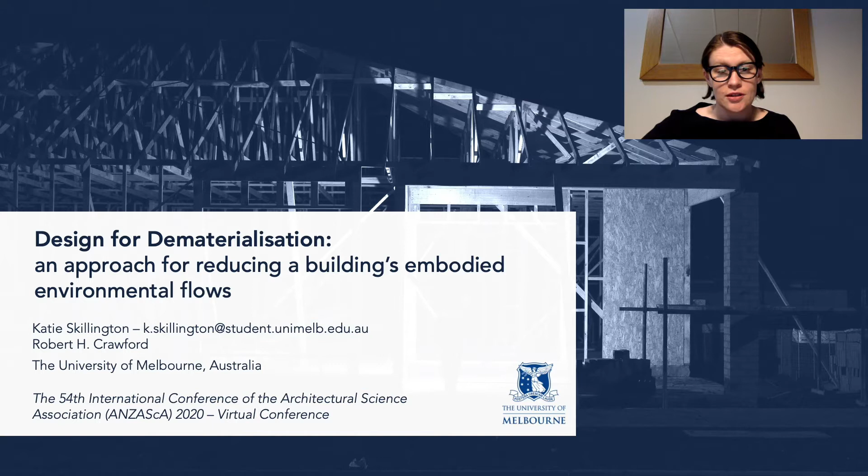My name is Katie Skillington, and today it's my pleasure to virtually present this paper, Design for Dematerialisation, an approach for reducing a building's embodied environmental flows.

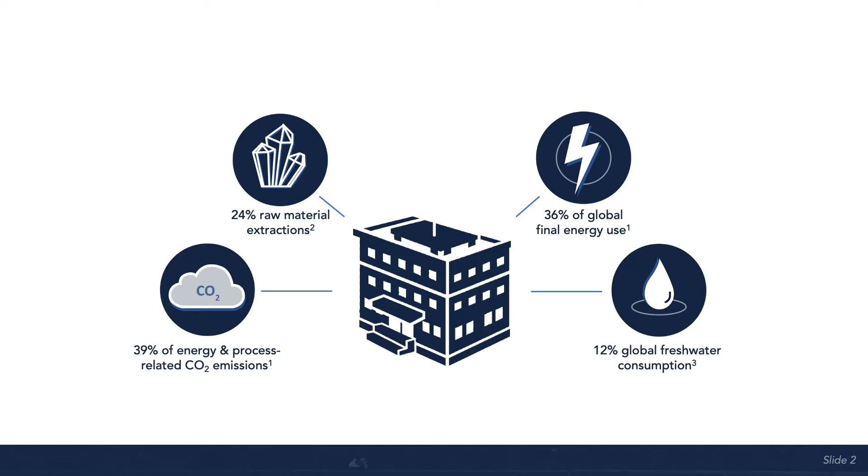We're all aware that building operation and construction contributes to significant environmental degradation, and as a result, the sector is under pressure to rapidly adopt more environmentally sensitive practices in creating the spaces in which we live, work, and dwell. To date, most efforts in doing this have disproportionately focused on the effects arising from building operation, which overlooks the increasingly significant embodied environmental flows such as water, energy, and greenhouse gas emissions.

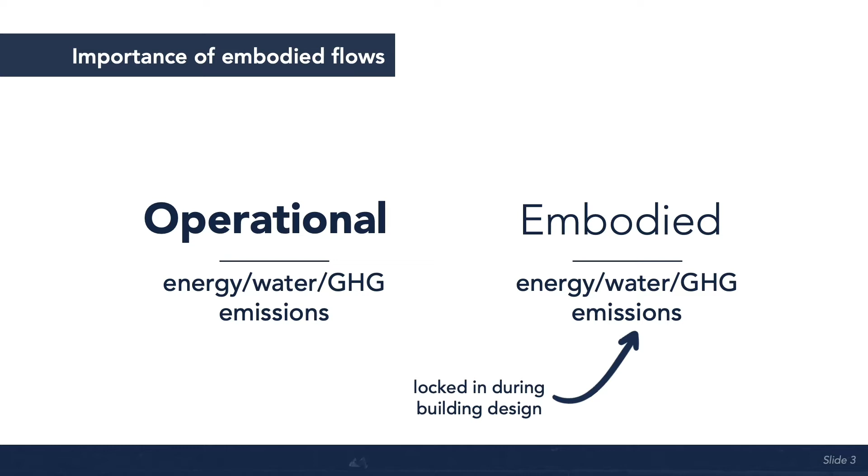These initial and recurrent embodied effects are often locked in during the building design phase, with a spike in demand or emissions occurring at building construction. With building operational efficiencies continually being improved and regulated for, and net zero and nearly zero energy buildings becoming more commonplace, a trend of embodied flows outweighing operational flows has emerged. Amplified by a continuing demand for construction material and resources due to population and building area growth, the need to address embodied environmental flows has never been more important.

So who is well placed to address this challenge? Stakeholders who determine a building's construction assemblies, materiality, and finishes, so designers. To do this though, we need to support our design stakeholders with improved information on design approaches that target a building's materiality and their possible effect on embodied environmental flows.

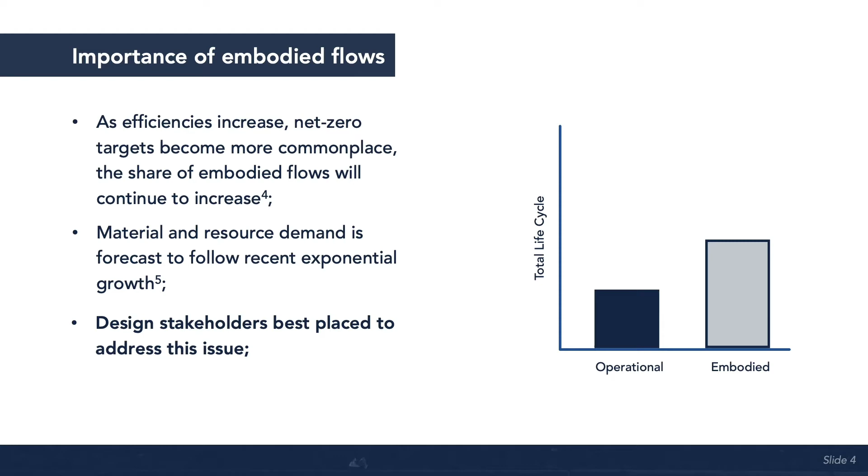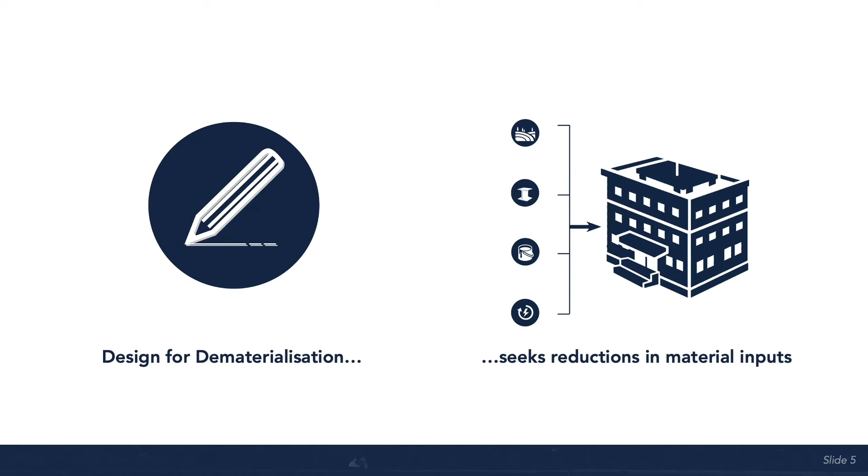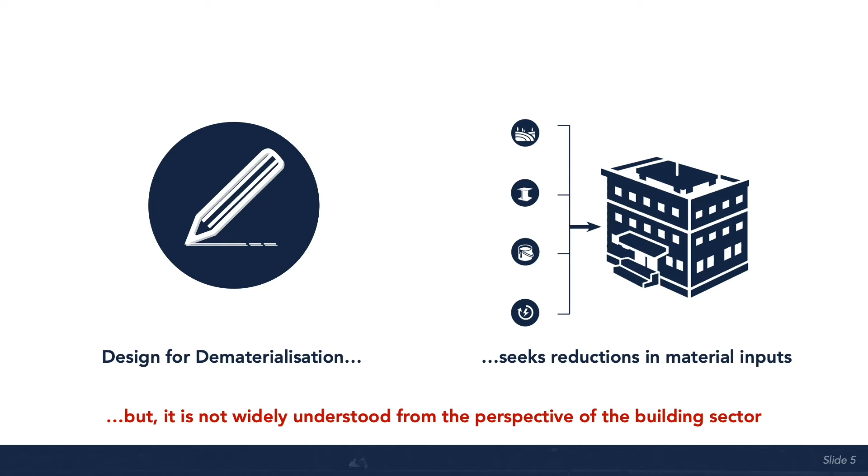Design for Dematerialisation, which is concerned with the reduction of material and resource inputs, is one approach that warrants further exploration due to its hypothesised potential. But it is currently not widely discussed in the building sector. This study sought to start to change this by providing the beginnings of this understanding, both conceptually and operationally.

Conceptually, as an approach, dematerialisation is more commonly researched and applied in the fields of industrial ecology, product design, and manufacturing. By using these sources and the limited literature in the building and construction field, this study defines design for dematerialisation as an early-stage design approach that prioritises reduced material and resource inputs across all life cycle stages of a building, whilst not negatively affecting the building's operational performance or intended function.

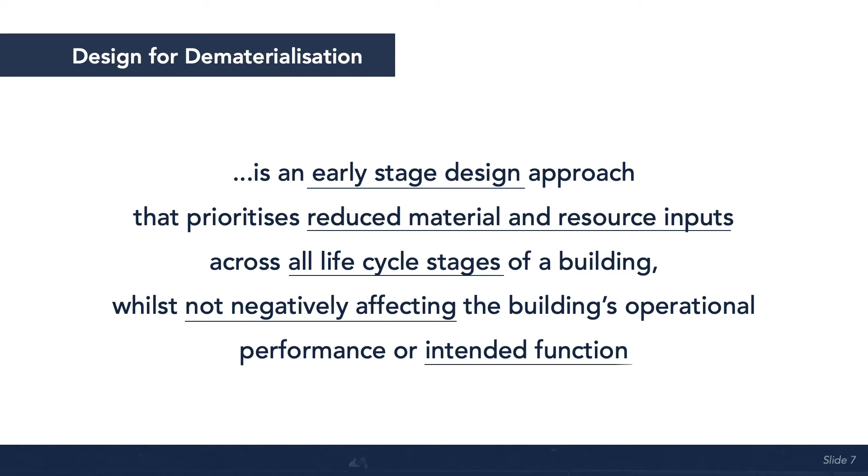Although dematerialisation bears strong similarities to principles of other concepts, when reviewing the literature, one point of difference emerged. Dematerialisation is not solely concerned with incremental efficiency improvements or material substitutions within existing product systems or designs. Whilst efficiencies and substitutions may contribute to progress, efficiencies alone will not ameliorate the effects of the forecast increase in demand for resources, nor will any material substitutions that don't account for indirect impacts.

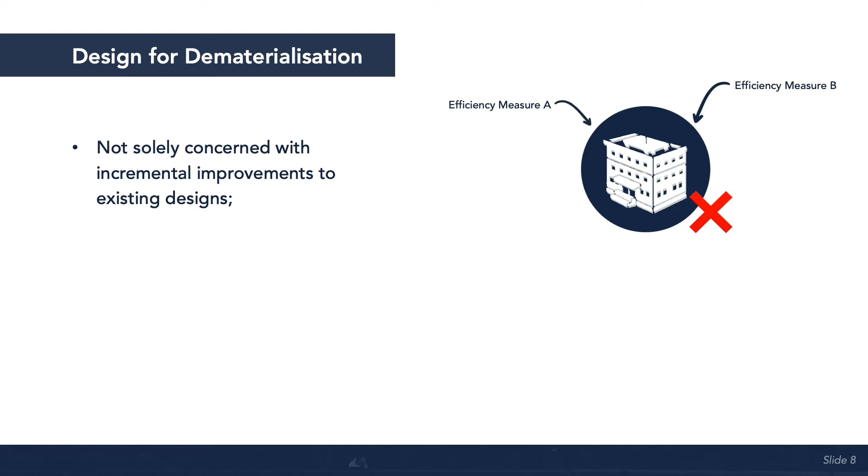Instead, dematerialisation requires a fundamental rethink or redesign of the product system from project inception, employing a life cycle perspective so that all indirect and direct impacts are considered and addressed from early on.

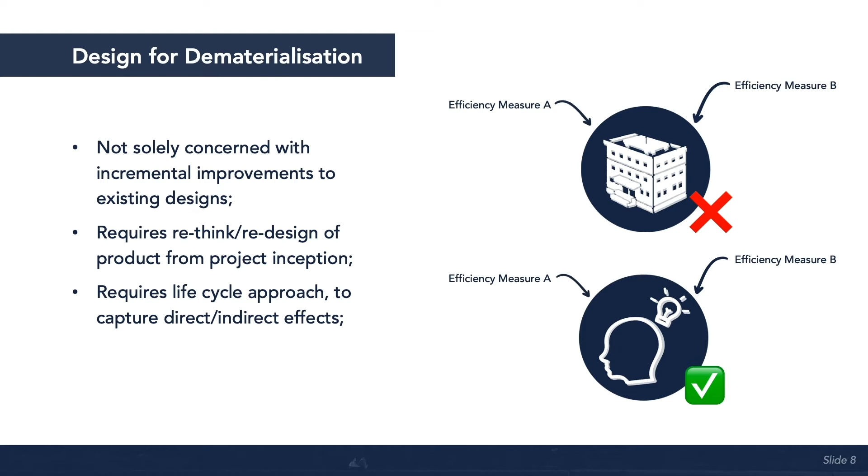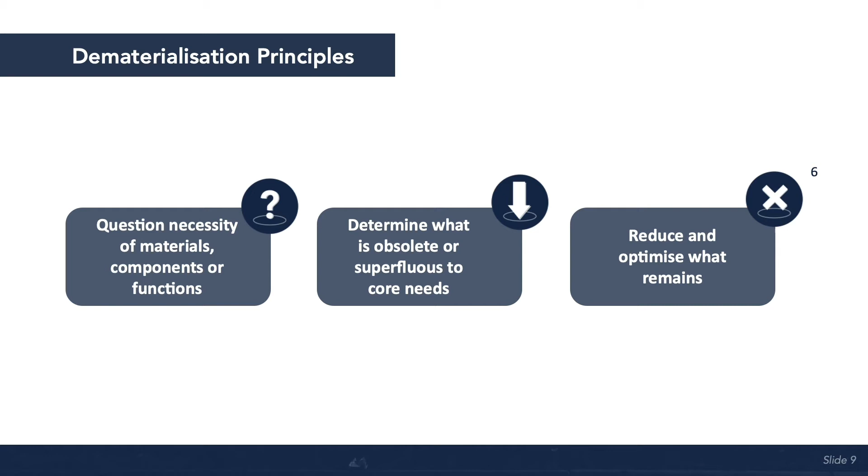To form an operational understanding of the approach, some broad guidelines and actions were deduced from existing literature. Firstly, beyond the adoption of a life cycle perspective, Brown and Lutz-Carrillo suggest applications of dematerialisation should be guided by a tripartite strategy, starting with evaluating the necessity of components or functions, then determining which aspects are obsolete, and finally reducing and optimising what remains.

Implicit in these guidelines is a questioning of user needs during early stage or pre-design work, and experimentation with alternative modes of delivering on these needs.

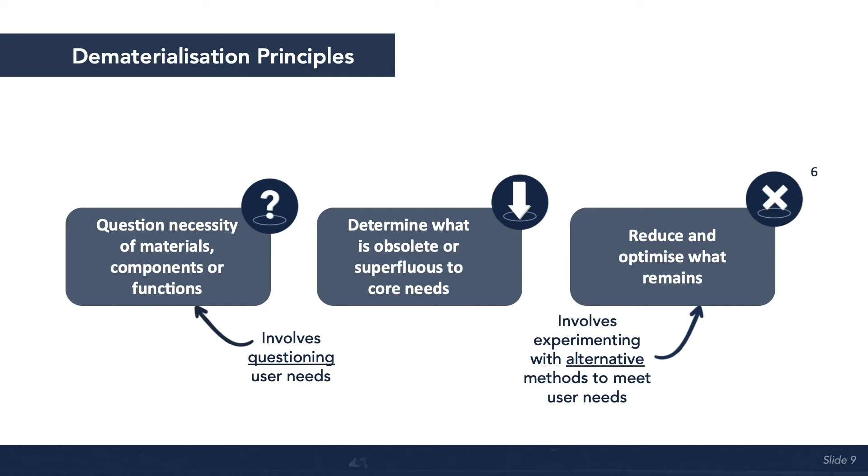Beyond these guidelines, there are also some broad actions that were determined as being part of the design for dematerialisation approach. Reduction via optimisation, which is probably the most obvious, includes reducing overspecification in structural systems, lightweighting, building system or construction assembly simplification, low energy, carbon, water intense products, or just simply getting rid of materials that are superfluous to servicing basic user need.

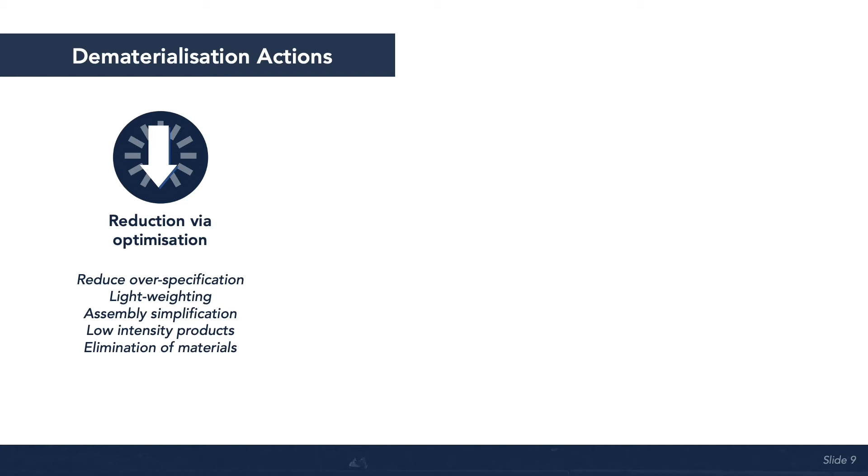Next, more intensive use. It was determined that this may involve reducing the physical footprint or size of a building, incorporating shared functions, or designing for multifunctional spaces and ongoing adaptability.

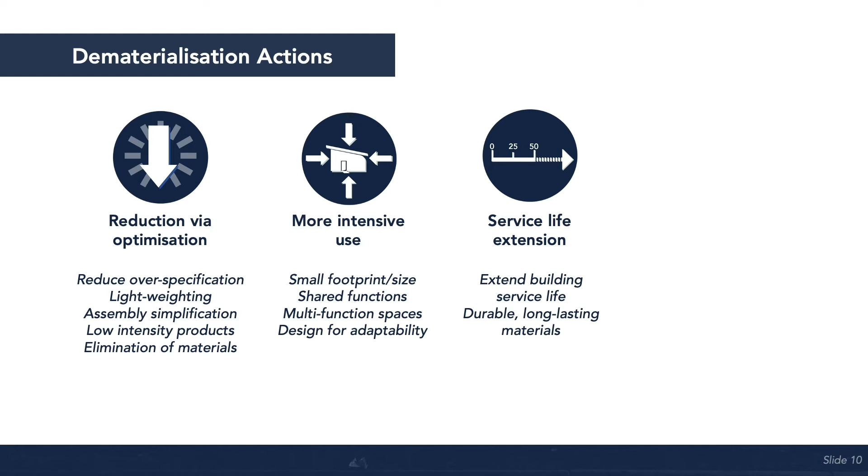Service life extension sounds pretty straightforward, and that's supported by the specification of more durable materials that require less frequent replacement or refurbishment, or designing for a longer building service life as a whole.

And finally, reuse, recycling and repair, which can occur across multiple scales. So it could include something as big as the adaptive reuse of an entire building structure, the reuse of a small component, or the use of recycled construction waste in the creation of a new product.

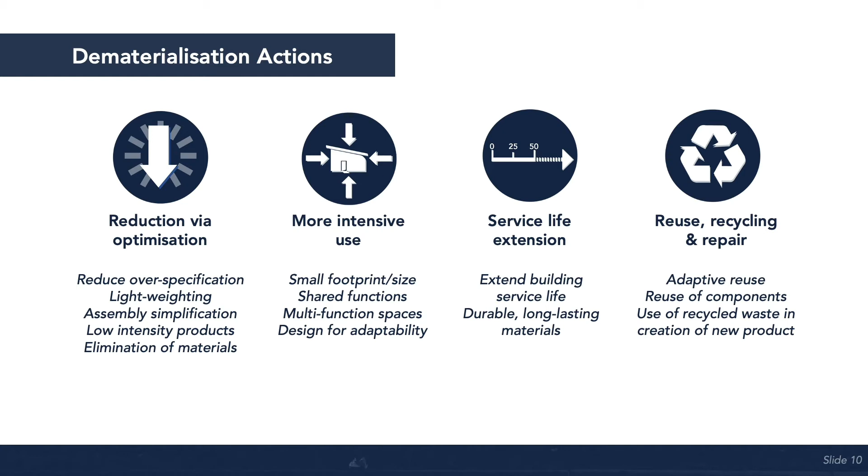Although dematerialisation research in the building sector was found to be not extensive, several drivers and barriers can be inferred from other fields. The primary driver identified was often cost, and the desire to lower a product's production cost by reducing material inputs.

Considering that cost is often cited as a barrier to the adoption of many environmentally sustainable design and construction practices in the building sector, this may position dematerialisation as an accessible, comparatively lower cost option for improving the environmental performance of buildings.

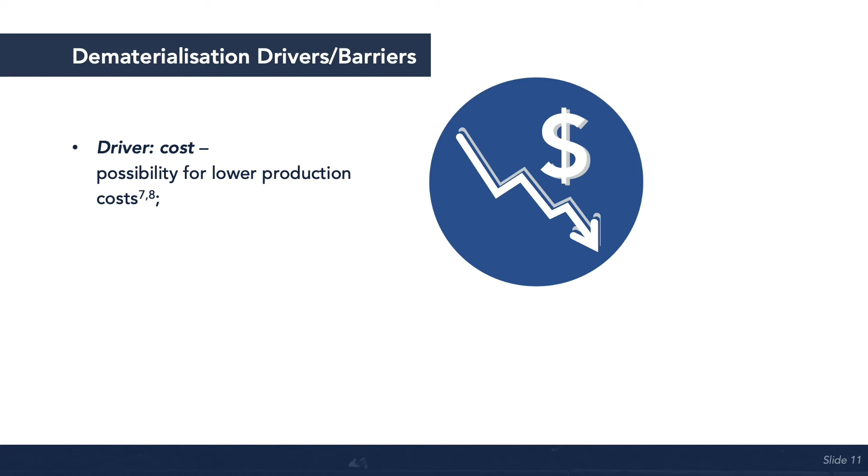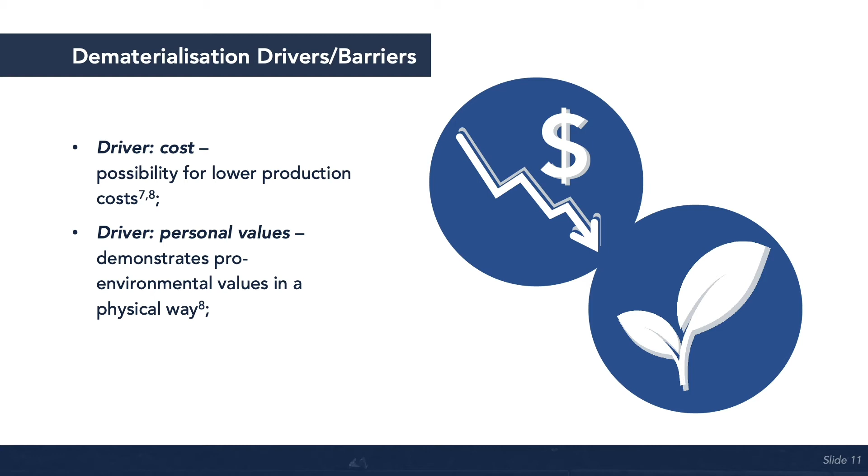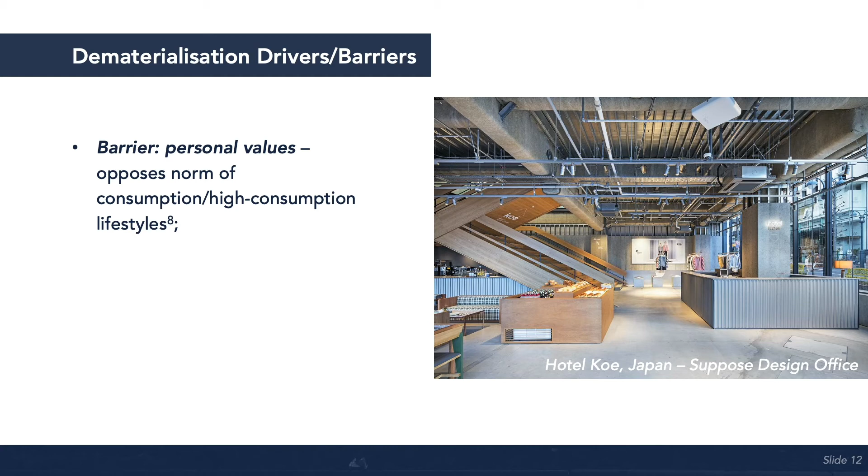Dematerialisation may also be driven by personal values, such as wanting to demonstrate pro-environmental values or behaviours in a physical way. Conversely, personal values may also be a barrier, as conceptually dematerialisation is fundamentally opposed to the norm of consumption and some individuals' desirability of high consumption lifestyles.

When we consider that ornament or architectural embellishment has been a way of personally expressing status, power, or wealth for centuries, the conscious act of reducing such elements through dematerialisation may be resisted by those who demonstrate wealth and status through their physical environments.

Aesthetics presents another possible barrier, as the application of some design for dematerialisation actions, particularly in building interiors, results in a clear kind of industrial style that may conflict with the aesthetic preferences of some developers, architects, or even building occupants, which may in turn hinder the prevalence of its application.

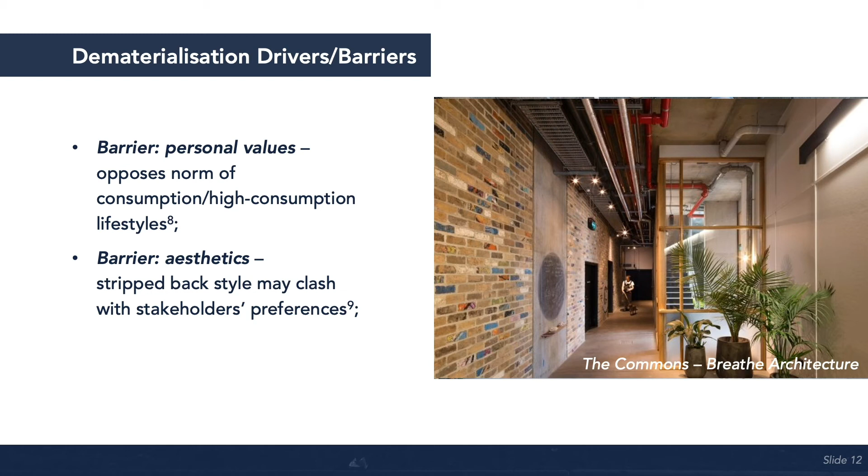Beyond conceptual and operational understandings of the approach, recommendations could be ascertained from the literature to further progress it, and these recommendations included the regulation of embodied environmental flows and the assessment of dematerialisation's effect on building performance.

Few places in the world have measures in place for regulating embodied environmental flows or impacts. Yet, if measures such as targets or caps to the embodied environmental flows of a building were implemented, or more broadly to various economic sectors, a stronger impetus to pursue approaches such as dematerialisation would exist.

This would then likely result in increased use. Increased use would then lead to evolution of the approach, as its performance and outcomes would be heavily scrutinised in an iterative fashion, and experimentation will probably be more readily entered into.

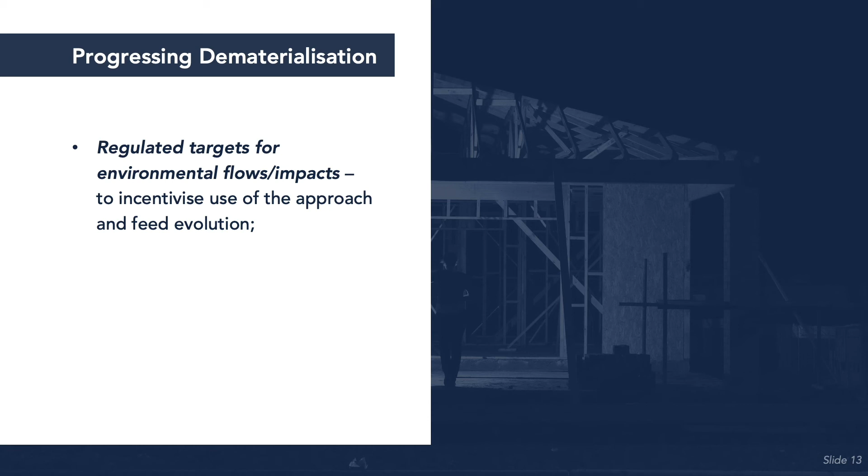Progress of dematerialisation would be further improved if another gap was resolved, that being the lack of data regarding the effect of dematerialisation. Several dematerialisation actions have demonstrated independently that they can contribute to savings in embodied environmental flows.

For example, increases in house size have been associated with increases in embodied environmental flows. Service life extension of a building can positively affect embodied energy demand, as studies have shown.

However, there remains very little empirical evidence of the magnitude of effect these actions can have collectively in comparison to typical practice, and then the possible trade-offs that may occur.

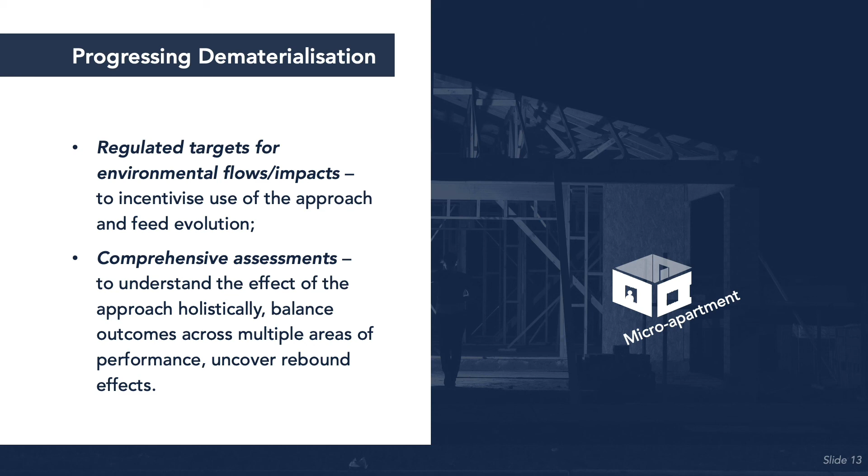One-for-one reductions in material demand don't necessarily equate to equivalent reductions in an embodied flow. For example, a micro-apartment may lower floor area per capita and result in lower embodied energy and emissions. However, if that apartment is located in a tall building, these savings may be offset by additional structural requirements.

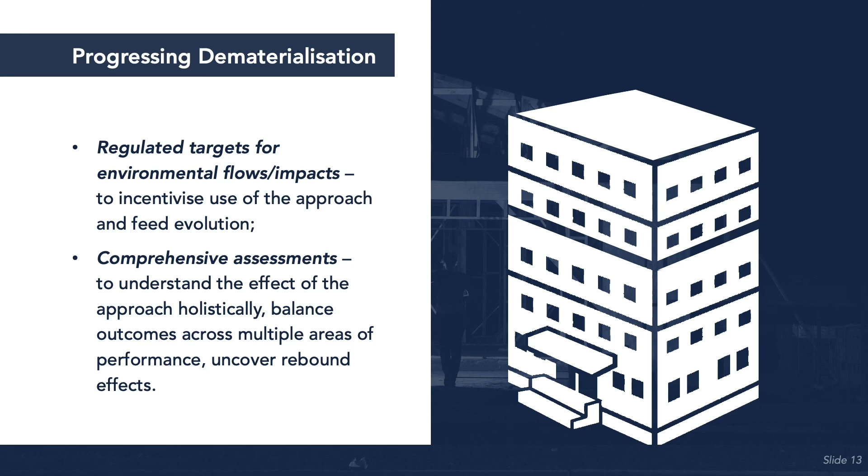Multi-criteria whole life cycle assessments of dematerialisation may help clarify the reductions in embodied environmental flows that can be reasonably achieved. It may also balance performance outcomes across multiple life cycle stages and uncover indications of possible negative second order or rebound effects occurring. So at a high level, the beginnings of understanding what dematerialisation is and entails in the building sector has been explored in this presentation and is summarised here.

However, despite this further understanding, the question of by how much embodied environmental flows are affected by dematerialisation in the context of buildings' whole life cycle remains unanswered.

Comparative multi-criteria assessments will help to demonstrate the relative performance of a building demonstrating dematerialisation, and more broadly, to better understand the approach itself.

Once completed, we will more confidently understand whether or not dematerialisation holds promise in the building sector as a means to reduce the embodied environmental flows of a building and contribute to a reimagining of a more sustainable built environment.